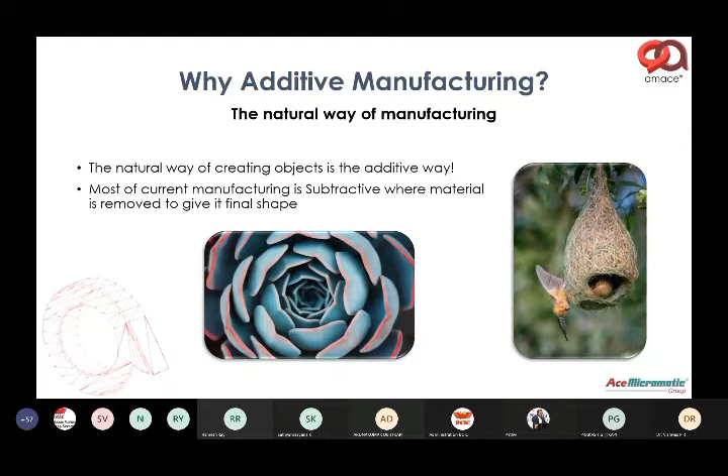In a similar way, what additive does is constructively add material to the exact shape or size that is required, and put the part or assembly together. So additive helps take us closer to nature, because the wastage we see in additive manufacturing is far lesser compared to conventional methods, which involve a lot of subtractive process. So this is one interesting aspect.

Today, one of the most popular methods is prototyping, which we've known for the past 30 plus years. People have been exploring additive manufacturing. In fact, this terminology until recently was very popularly called rapid prototyping, which for 20 plus years people called it, and even today some use it synonymously with additive manufacturing, because the technology was mostly popular for prototyping.

However, today things have changed. The technology has come a long way, not just limiting itself to making prototypes, but also being suitable for a production environment. But even in India today, the most popular domain for this subject is prototype development. So it not only allows you to develop components, but also assemblies much faster compared to conventional routes.

In many cases today, the whole manufacturing scenario is such that people want things very fast. What used to be a 5 or 6 year product development life cycle has probably shrunk to 1 or 2 years today. The expectation of newness is very short-lived. People get used to seeing something launched 1 or 2 years ago, and they want to see newer products.

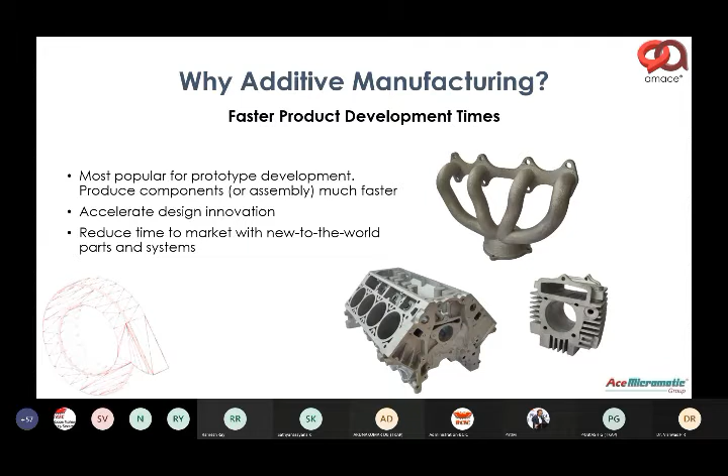Now, you brought this exact term, complexity for free. I'd like to illustrate this terminology in the form of a graph here. What you can see beautifully is a graph showing complexity versus cost. We all know that with increasing complexity of parts, the cost increases almost exponentially.

Something that is very complex, be it in shape, size, intricacy or criticality, would call for more axes of manufacturing, more stages of manufacturing, or more process. It becomes more process intensive, which is why the cost ends up becoming more and more. This is very common, we all understand this subject.

Now, when you bring in additive manufacturing, the interesting aspect is beyond a specific point, additive manufacturing ends up becoming almost free of cost in terms of complexity, meaning irrespective of the design, shape or size of the part, the only thing that matters is the volume, the printing time, and the material consumed. So if 200 grams or 300 grams of aluminum has to be printed, whether as a plain block or as a very intricate aerospace part, the cost of manufacturing would be almost similar. That gives a clear analogy of how additive really supports complex part manufacturing.

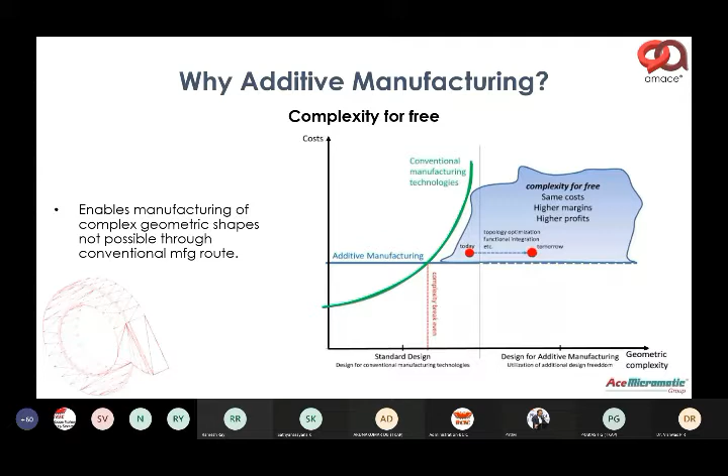Now, another interesting aspect is part consolidation. You can see a beautiful example here, courtesy General Motors, where for a seat belt assembly they've gone ahead and done part consolidation using design for additive manufacturing, wherein individual pieces, about 8 individual components, were all integrated into a single part.

Not only did this make it 40% lighter, but it also made it 20% stronger. You can see the monolith structure that is produced by 3D printing on the right-hand side.

Leaving the cost part aside, this is what they decided to do for a high-end automobile of theirs, which they felt would bring in not only reliability but also achieve a lot of the GD&T aspects. Today we all know an assembly is the sum total of all the parts that we put together.

Stack-up tolerances end up hitting you when you have individual parts which have to be made so critically. In this case, since it's a monolith structure, your overall accuracy can be achieved in a simpler way, as opposed to producing parts individually with geometry tolerance maintained and then putting them together as an assembly.

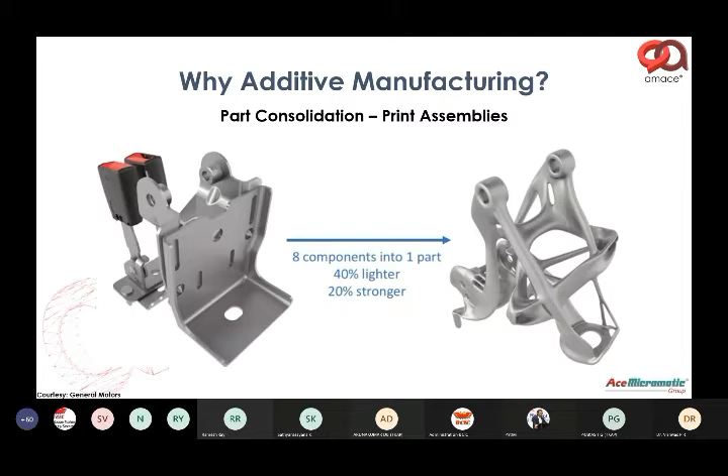Also, reliability increases because fewer joints mean better reliability. We all know that from our design school. This is an interesting aspect which is happening more and more, and it's being accepted very well. We'll see some more live cases going ahead.

Sir brought out another interesting example: mass customization. What does customization mean? We all know a tailor typically does customized clothes stitching for us, as opposed to what is available in a ready-made garment shop.

A very beautiful example, as Sir mentioned earlier, is customized hearing aids. Today, I'm sure we don't know the fact that any hearing aid our older people end up getting is made customized for the specific person's ear, ear size and shape.

So they're all 3D printed. You can see on the top left corner, the orange colored image is a hearing aid made specific to every person's ear lobe, or pinna, or the internal aspect, so that it fits in fine, as opposed to what used to be a generalized one-size-fits-all concept.

This allows the fit and function to be a much better match when it's a customized one as opposed to a generic one. Similarly, at the bottom, what you see is a dental crown.

Today, another interesting aspect we see is a dental crown. What used to happen was a mold taken in wax or another softer material, and then a crown is manufactured.

As opposed to that, today dentists are using intraoral scanners, and they create a 3D model in a very short time, and the lab technician prints multiple of these dentures.

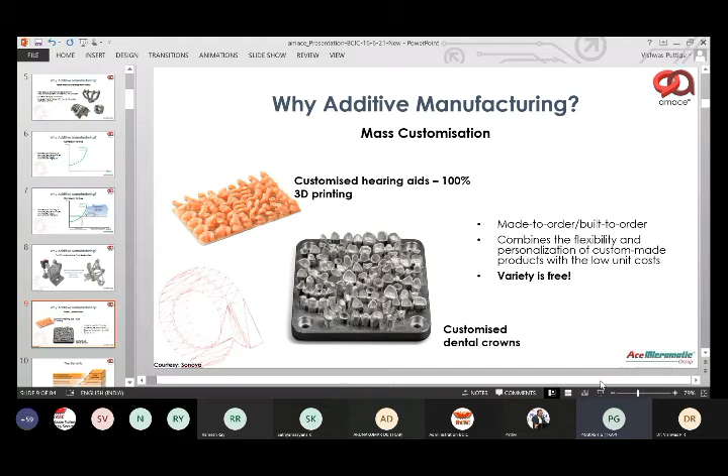So the batch size could be as small as one, and manufacturing can happen in large volume. That's the beauty here, and that's the interesting aspect of mass customization.

And then part replacement, which is reproduction of parts to avoid complex manufacturing processes, where you'd have heavy investments in tooling. All that can be avoided by printing parts where smaller volumes are required. And part consolidation, we discussed.

And of course, there's a topic called DFAM, which is Design For Additive Manufacturing, where you optimize the parts to suit 3D printing. We'll touch upon that going ahead.

So that was the why of additive manufacturing subject. Now let's look at the feasibility perspective. When we say feasibility, what are the parts that are feasible?

Though this sounds very interesting, and we go ahead and say almost any part that is required can be 3D printed, anything that can be designed can be manufactured, that may not be the case all the time. There are certain criteria, certain qualifying aspects which need to be considered before we decide if 3D printing is the most feasible route.

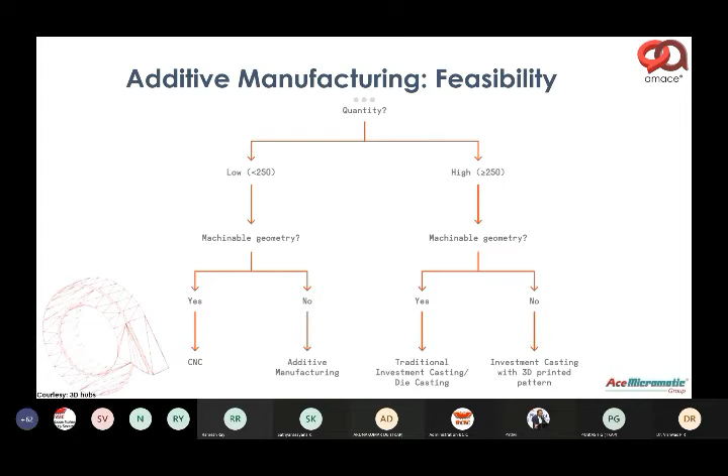What's interesting is that complex patterns you need to reproduce for castings or parts can also be 3D printed, which otherwise needs conventional manufacturing. 3D printing comes in handy here. So it's not for one specific aspect, but can be used for a wide set of activities from manufacturing. This is one aspect from a feasibility perspective.

On the same lines, here you can see a comparison between subtractive and additive manufacturing. On top is additive manufacturing, and the bottom image on the left is subtractive manufacturing. As I explained earlier, conventionally, to make a part like a sphere here, a lot of subtractive or waste material gets generated.

You mill it out and then scoop it out to get the actual part. Whereas with 3D printing, with very minimum wastage, you're able to get your final part out because you're adding just enough material to get the part to its final shape.

Now on the right side, what you see is a comparison. We saw cost versus complexity earlier, but at the bottom I'd like to refer to cost versus number of components. You can see when the volumes increase, 3D printing may not be very feasible, especially because your costs generally tend to be on the higher side.

Whereas with conventional manufacturing, when your volumes are low, your investment towards development cost, or towards making dies, fixtures and patterns, is going to be expensive. So there's a tipping point beyond which, in terms of number of components, 3D printing may not be very suitable, unless varieties or complexity in the specific parts increase. This is another interesting feasibility perspective used to decide when 3D printing will be very useful for manufacturing.

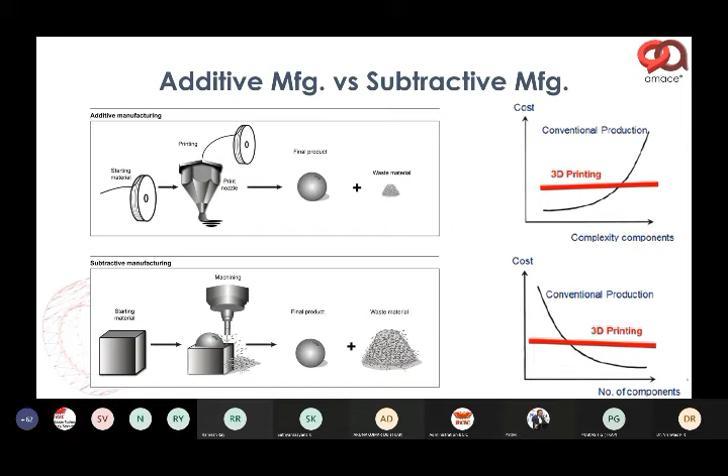This is basically the process flow to give you an idea of how 3D printing happens. From the design stage, stage 1, shown here as a 3D CAD or 3D model development, we convert it into STL. STL is a format of your 3D model which converts any volumetric part into triangulated surfaces, as you can see there, and those triangulated surfaces are further sliced into multiple layers, as shown in stage 3.

This is an exaggerated version showing thick slices, but in reality the slice layer thickness could be anywhere from 30 microns up to about 100 microns, and each sliced layer's data is fed to the printing machine, which fuses layer to layer creating a strong bond, forming the solid part. There could also be a small finishing activity, shown as surface finishing with a hand tool, giving the final shape. This is a generic process flow for 3D printing.

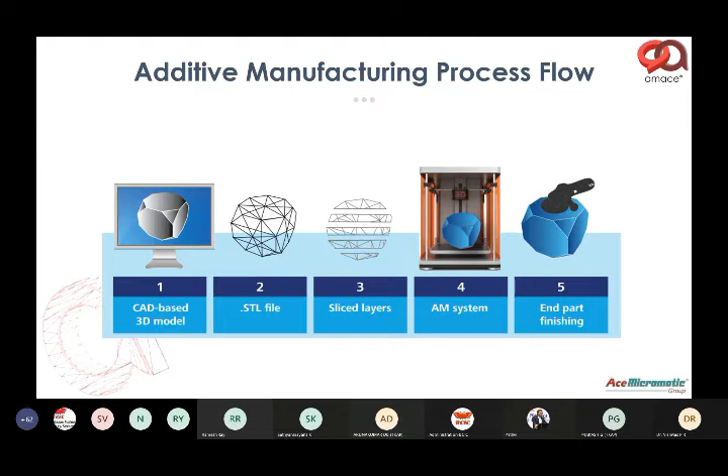So this gives you an idea of the feasibility perspective. Now let's look at different technologies that are there in additive manufacturing.

Though this looks like a big image here, on the left side I'd like you to look at the different materials currently popular for 3D printing - things like wax, plastic, sand, metal, ceramic. These are some of the more popular ones being used. Other than these, there are many more happening in terms of biomedical or tissue and organ printing, and food printing. There's a lot of interesting research going on in each of these areas.

But specific to industry, we have an interesting aspect here. At the bottom, what is shown is from a durability perspective, surface finish perspective, detailing perspective, or application perspective - lower and higher. There's a distribution which shows what technology has found more application or more suitability.

So these are some of the prominent technologies today: stereolithography, polymer jetting, binder jetting, fused deposition modeling. The FDM technology is the most popular for plastics or polymers. These are more popular for hobby or small desktop printing, which you'd find in a lot of manufacturing areas or small education institutions.

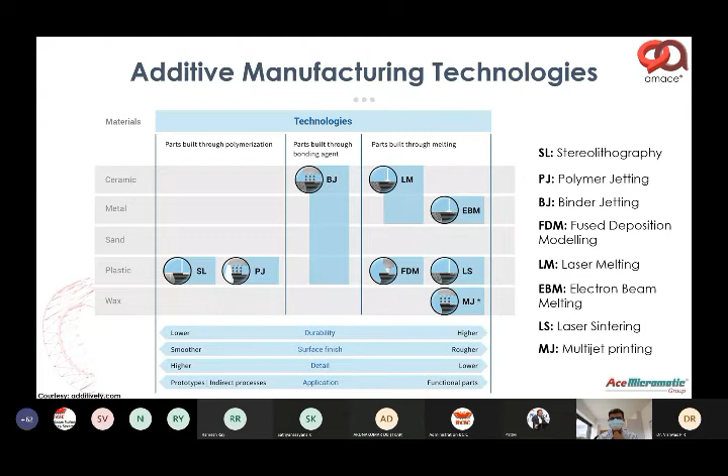So these are some examples. I don't know if I mentioned sand printing today - there are machines which can print sand to give you better molds to make your core box or your parts, making it much more feasible, which otherwise is very difficult to manufacture using conventional processes.

You have multicolored polymer printers, which means you can print almost near-life parts. In fact, a very straightforward transition has been made by all our 2D printers - printers like HP, Canon, Ricoh and other 2D paper printer manufacturers have upgraded themselves into 3D, because it's a very logical diversification for them, taking what they did with colored material on paper and adding the third dimension to the manufacturing space.

So polymer is again very popular, but mostly for applications which are not very industry specific. Then ceramics - not only for interesting, aesthetically good looking parts, but for a lot of high temperature applications - ceramics is drawing a lot of attention. We have graphite being printed, and of course metal is well known.

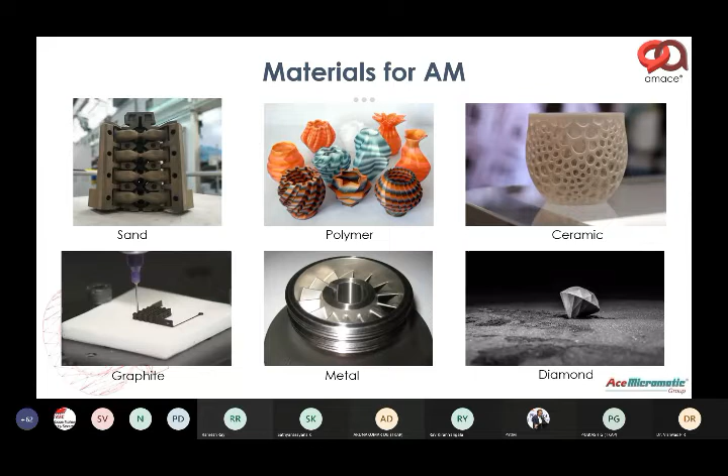One of the latest is diamonds being printed - not necessarily for ornamental purposes, but for cutting applications. We're all familiar with Sandvik, who's been doing diamond cutting tools. Now they've gone ahead and printed diamond for some high-end cutting applications where very high levels of hardness and toughness are required. So people have been doing different materials - these are some of the more popular ones shown here for illustration purposes.

Now this is an animation which shows you how the printing technology works. You can see powder being spread by the spreading unit, and after spreading there's a laser which melts it. This is more popular for polymers or metal printing, where metal powder is spread on an existing plate, and the laser melts that powder in a selective area as commanded by the program or controller, forming that irrevocable bond or fused part.

You can see on the left side a part printed almost 70-80%, sitting in the middle of a cake of powder. The melted part is the solid part, but around it we have complete powder surrounding it, because it's formed in a layer by layer way. You can see the layer thicknesses - accuracy is something that would be of interest to you today.

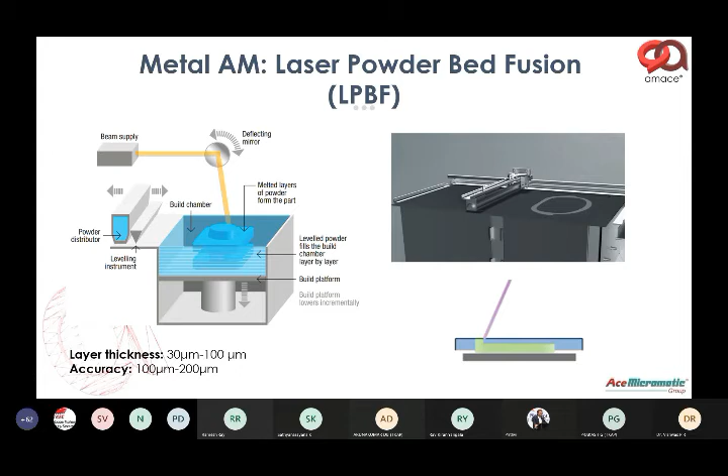The parts printed in this way are not necessarily fully finished in terms of functional use, but it's much better than near net shape. It can give you close to 100 microns tolerance levels. So for parts which have open tolerance or minimum tolerance requirement, these would be very suitable. But for something much more critical, you would still need that final finish skin cut to give it that final accuracy or get that final dimension right.

So that's the one small missing aspect that needs to be worked on further. People are working on that. So what you can see here is another similar video which will show you the metal printing that's going on.

The interesting aspect is it doesn't need any further post-processing. It can get separated either with a hand tool, a bandsaw, or a wire cutting machine, and then used for its final application. So this is basically how the concept and technology works, and how the parts are produced using 3D printing.

All it needs is a 3D model. So you can take it from a design stage or design desk all the way to a finished part in a matter of few hours. We have some very interesting cases which we'll share, showing how we've been able to meet some of the urgent demands in the industry in a very short time using 3D printing.

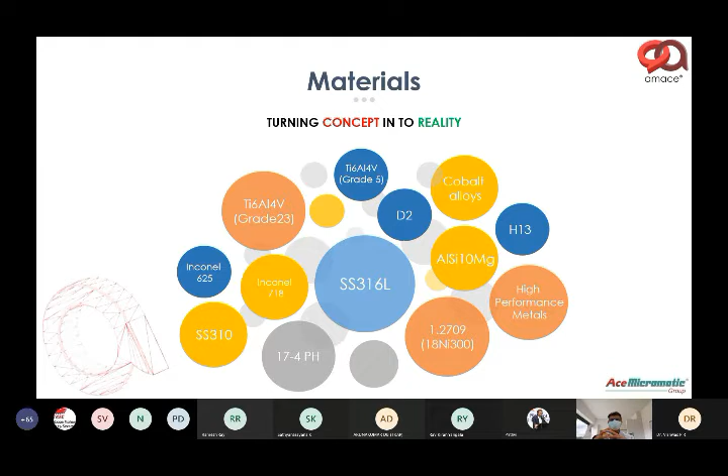Though the basket of materials is limited compared to what's available conventionally, people try to map each of these materials to see what would be closest for their specific application, and then use that either by altering process parameters in printing, or as a post-printing activity like heat treatment or surface treatment, to bring it close to the metallurgical aspects or mechanical properties needed. So this is what we've summarized from a metal perspective.

Moving on to DFAM, or design for additive manufacturing. What additive actually does is, it will never be able to replace conventional manufacturing in the form where if you're producing a part for 500 rupees, we can never answer the question, can you do the same thing for 499 or 480 rupees? So it's not a direct apple-to-apple replacement compared to conventional manufacturing, which gives the reliability or feeling that it's still a very long way before 3D printing can directly replace any conventional manufacturing process.

However, where you can bring out or leverage the strengths and advantages of 3D printing, people have been able to benefit immensely using it. For that, what's necessary is this subject called design for additive manufacturing, where one needs to unlearn some known technologies of design and relearn methods of 3D printing or additive manufacturing.

One aspect you need to understand is how to go about the 3D printing process. DFAM, or design for additive manufacturing, is a method for understanding how intricate shapes can be made, how to achieve weight reduction or part consolidation, or any specific optimization of design needed to meet your end goal requirement. There are multiple aspects to design for additive manufacturing, but two of the more important ones are what we'd like to explain here.

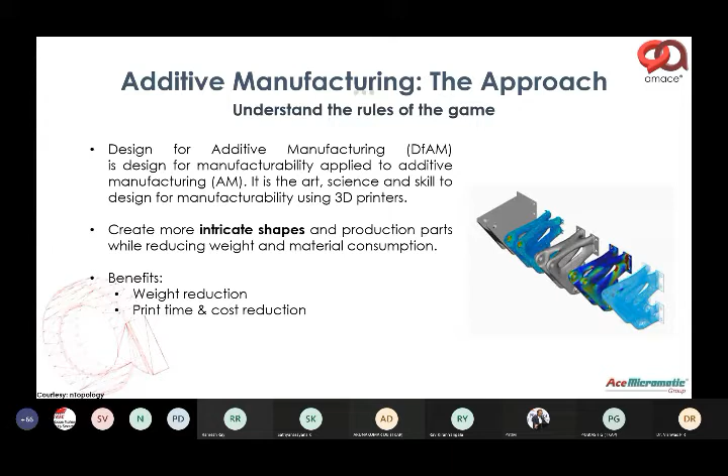One of them is called topology optimization. You can see multiple images and examples here, and what's illustrated is modification. Topology optimization is basically where you change or modify the topology or geometry of the part to suit 3D printing, thereby also meeting your end goal.

In certain cases, if you do an analysis for structural optimization, thermal optimization, or weight optimization and run it through software such as ANSYS, invariably the design that comes out is much lighter, but also very complex to manufacture or even comprehend manufacturing. For sake of manufacturability and ease of manufacturing, we end up adding a lot of additional redundant material to the design so it meets feasibility requirements for casting, forging, or other manufacturing processes.

Whereas with 3D printing, that doesn't exist. You can see some of these parts optimized for weight reduction. Here's a classical case of a manifold block where a weight of 30 kilos was reduced to almost 5.5 kilos by 3D printing.

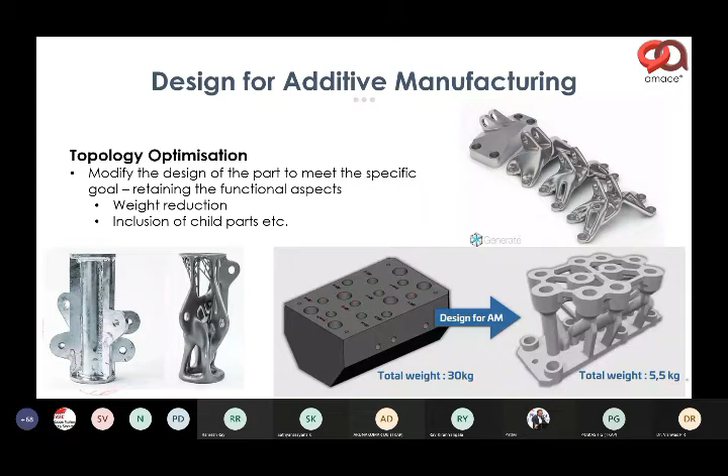Part consolidation was another interesting aspect. You can see each of the rivets or child parts that were assembled were eliminated because of 3D printing, since those features could be directly created in the printing process itself. That's the interesting aspect and strength of additive manufacturing, and what design for additive manufacturing is doing.

If someone asks, okay, now let's start working on 3D printing, what's the one aspect you'd want us to focus on? I'd say start learning aspects of design for additive manufacturing, start exploring this because it doesn't cost much. There is simple software for each application, be it medical, aerospace, or automotive, and people working on it where you can explore design for additive manufacturing.

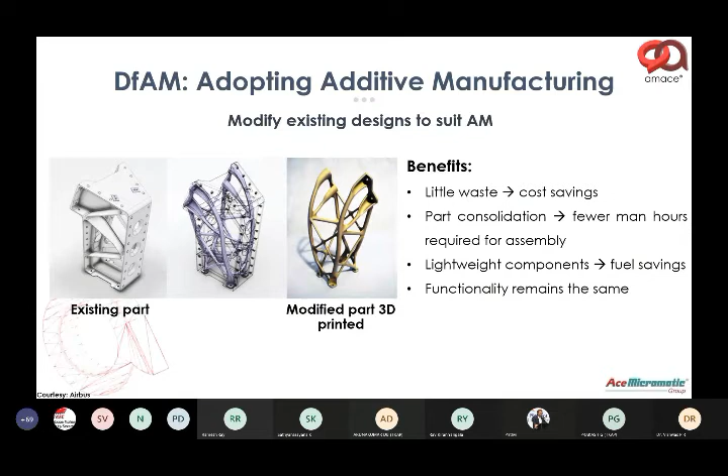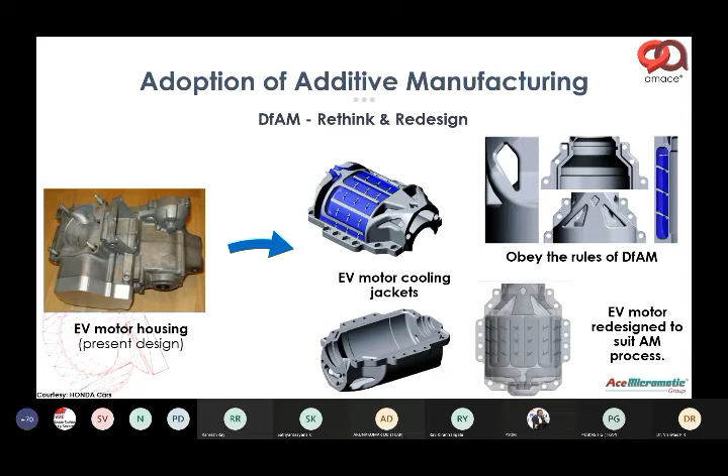Here are some more cases, again for electric vehicles, where people have explored making cooling jackets using 3D printing by creating artificial cooling channels. I believe this was done by Honda Cars in Japan for their electric vehicle, where it follows the rules of 3D printing, or DFAM, in their manufacturing.

Another interesting aspect of this design for additive manufacturing is lattice structure. One is, of course, optimizing the structure itself, but second is to make it lightweight. So which is nothing but adding these perforations, called lattice, instead of an infill of solid material. We add a lot of lattice structures here.

This not only makes the part lighter, but also retains, if not makes it stronger, the functional aspect of it. In many cases, by 3D printing lattice structures, you're also reducing the cost, because one of the key considerations for cost is the amount of time you're engaging the machine or the material you're consuming. When you're producing parts with lattice structures, you're spending less material and time on the machine, thereby reducing the cost also.

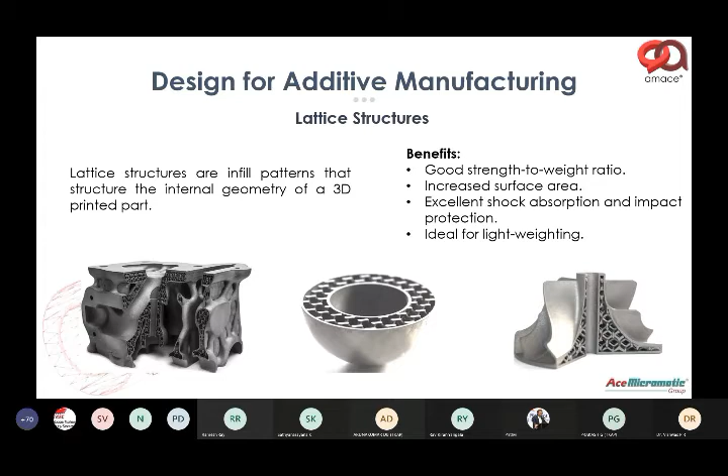This is another interesting aspect being explored by people doing 3D printing or considering it as a method for part development, where they infill their parts with lattice structures like this, as you can see. So this is just a summary of additive manufacturing, or design for additive manufacturing.

Now the interesting aspect we'd like to explain is market segments and case studies. Multiple markets, multiple segments are exploring 3D printing. We'd like to show you some of the more prominent ones today. Some of them, as explained here, are medical, aerospace, automotive, tooling or die mold, and finally general engineering.

If you look at it from a distribution perspective, you can see today this is how it's spaced out. We have medical being the largest, because of some very interesting aspects which we'll see next. Others are civil, aviation, and defense, which take in more than 23% of total market share.

Sorry, I lost my screen. Is my screen visible? Yeah, your screen is visible.

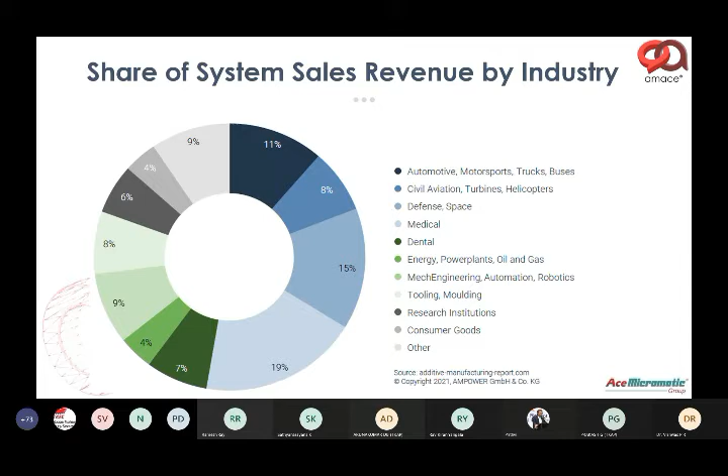You're right now at the share of system sales revenue by industry. Sure, okay. Other fields, like I said, automotive is about 11%, especially for high-end applications of motorsports, where it's taking a lot of interest, and many other segments. So the more popular segments, which take away more than 50-55%, are medical, aviation, automotive, and defense. So that's the segment-wise distribution.

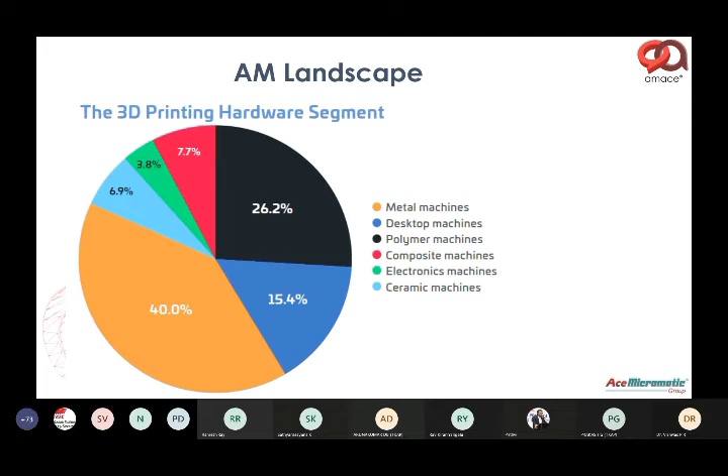Again, there are different technologies within each of these. We will skip this aspect, just to give you an idea: metal printing, especially the powder bed fusion one we saw a while ago, is the most popular technology and most used in industrial application by each of the sectors we saw earlier. That takes away at least about 39-40% of the overall market segment.

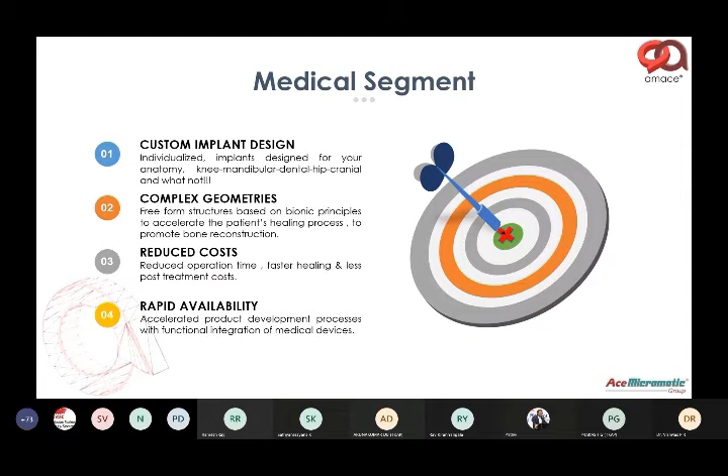From a medical perspective, what is interesting is custom implant design. Today, one of the most preferred areas is medical printing of implants. When I say implants, I refer to things like what is shown here. You can see a cranial implant, which is basically a skull part.

Today, when a person has an accident and there's a skull injury, and the doctor declares there's bone loss and he needs an implant, the patient's family invariably has two options. One is to go for a standard implant, a titanium plate made out of a conventional process, and to suit that existing plate, a good portion of the patient's bone will have to be chopped off so it can fit in. This is very similar to telling someone 40, 42, 44 sizes of shirts as opposed to a precise custom size.

Whereas with 3D printing, all we need is a DICOM file which comes out of CT scanning or MRI scanning tools, which a doctor gets done for the patient anyway, and that itself is enough. In about 2 or 3, even 4 or 5 hours, you can have an implant ready for the patient, specific to that person's shape and size.

On a similar line, you can see kneecaps being printed. This acetabular cup, or hip socket, with a lot of lattice structures, is being 3D printed today, mainly because the uniqueness here is that it allows bone tissues to grow through them.

It's a process called osseointegration, which means the bone tissues or muscle tissues grow through these lattice structures, giving it a much better bond and less pain to the patient, and it lasts much longer as opposed to the conventional methods. So mandibular is the jaw joint of a human.

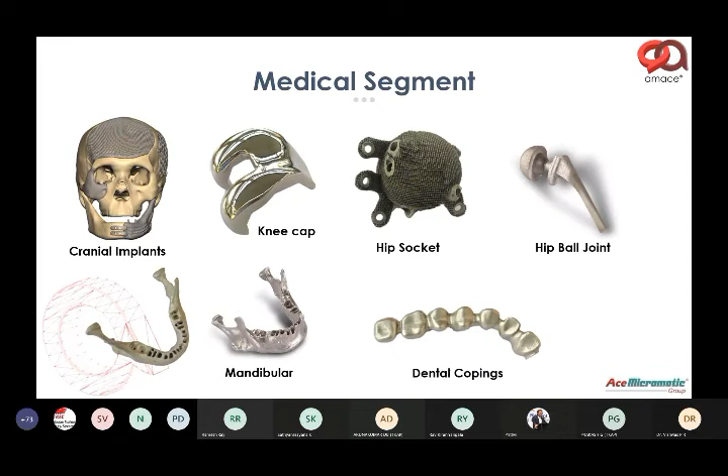So this is an interesting case for parts for medical equipment. This is something that was done during the lockdown by us. One of the ventilator developers wanted some parts developed or made in a very short time.

We received an inquiry at 10 in the morning on a specific day during lockdown. Fortunately, we were working, and in about 45 minutes, a proposal was sent. The customer confirmed in about 3 or 4 hours, saying they'd like to go ahead with it. We printed the part, and the next morning at 9:30, the parts were shipped. So in less than 24 hours from receiving an inquiry, the parts were shipped to the customer.

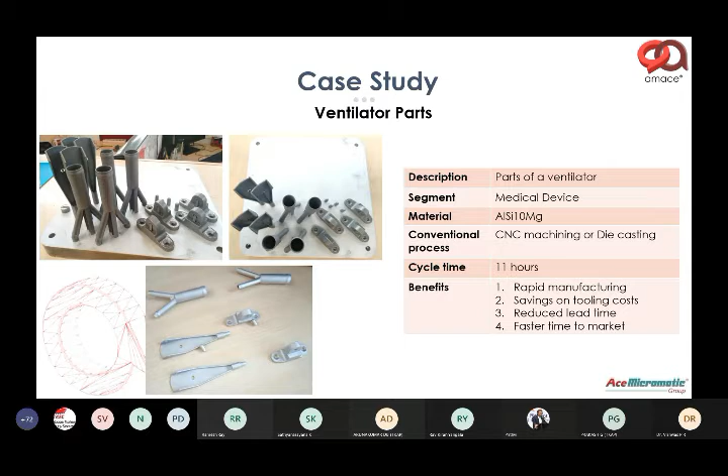So it just gives you an idea of what 3D printing gives you in terms of capability and the potential this has for any industry. This was a specific case where there was an emergency and it needed that kind of attention, but it's possible for all other sectors also.

Now, very interesting is this here, which is bioprinting. This is a game changer in human life, where people have been successful in printing human tissues and human organs - especially tissues where you can see ears, nose, and different skin parts, facial elements being 3D printed today, especially in an aspect called facial reconstruction of human faces, which is happening very well, where people who either as a part of their cancer or a war victim have lost a major part of their faces are being reconstructed, mostly from a cosmetic perspective.

Another interesting aspect is artificial organs. Today, I'm sure you all know there's a long waiting of at least about 25-30 years and over many lakhs of rupees for any of these organs, if any one of us wants an organ to be transplanted. Whereas if something can be 3D printed, they can be made in large volumes, and these requirements can be met much better. This is already happening today. Even in Bangalore, there are people working on bioprinting, where some of these tissues are being reconstructed and 3D printed. So this is going to be a game changer going ahead.

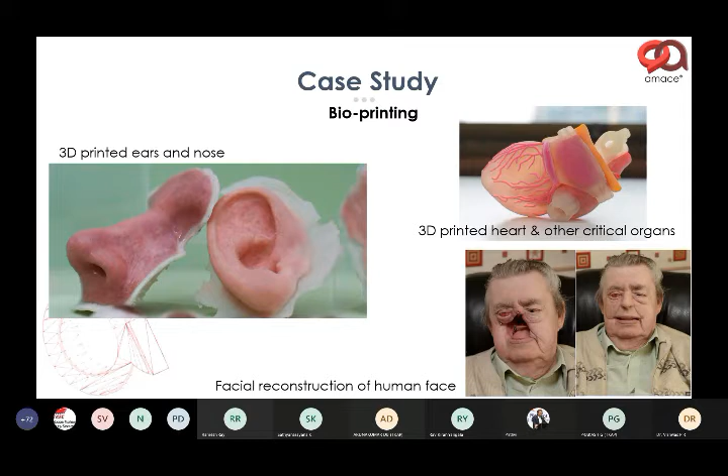It has already been proven, airworthiness done, tested, and today available for commercial applications. So this is what is happening.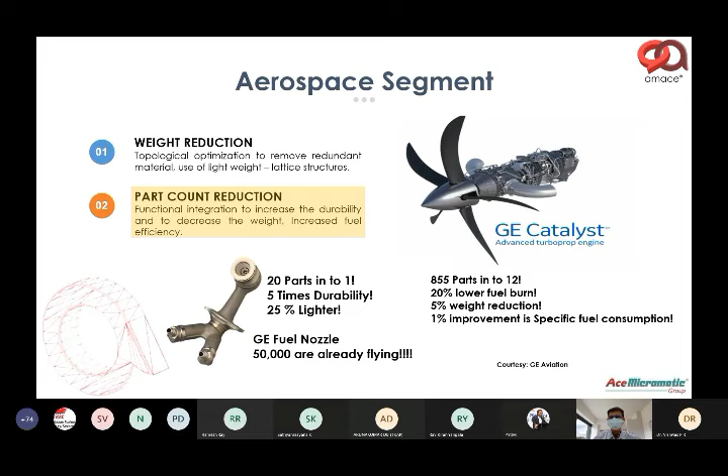From a cost effectiveness perspective, in aerospace the buy-to-fly weight can be as low as 2 to 3%. By buy-to-fly, I mean the input material weight for an aerospace part could be as high as a 10 kilo titanium block, but the final part could be as low as 200 or 300 grams. So the entire remaining weight goes away as scrap, which sells at maybe one-tenth the price of the actual raw material. Whereas with 3D printing, you are able to manufacture the part with just enough material and then give it the final finish cut or finish machining to get the final output. That makes it much more cost effective for aerospace applications.

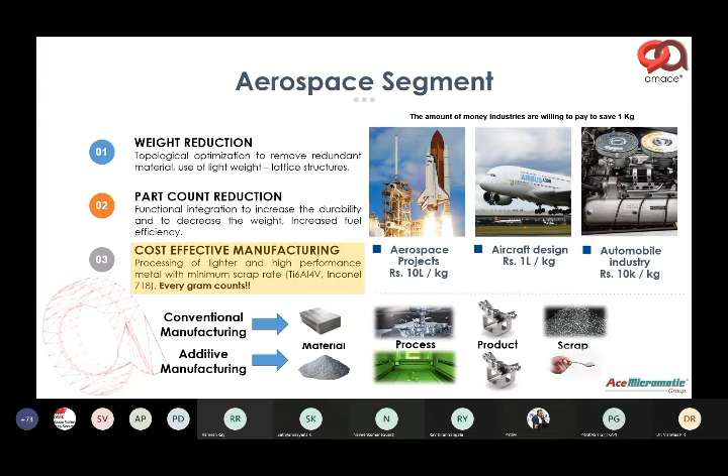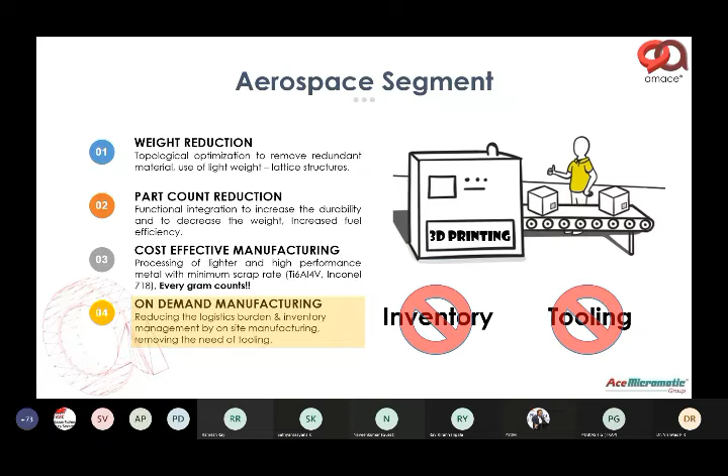And finally, on-demand manufacturing. This is another interesting case, not just for aerospace but even for automotive. On-demand means producing a part right in time, only when it is required, at the place where it is required. In an automotive context, the interesting aspect is spare parts, which we'll touch upon shortly. But with aerospace, what it means is no inventory, no tooling. You are directly making the part right when it is required. That's the interesting aspect on-demand manufacturing has.

So these are some examples of different parts and equipment being made. We saw the fuel nozzle. In fact, on January 25th, 2020, the engine made for the Boeing 777X took off, and it's been flying today already with over 300 printed parts in that engine. This shows that these are not just for prototypes, but have already come of age for full production.

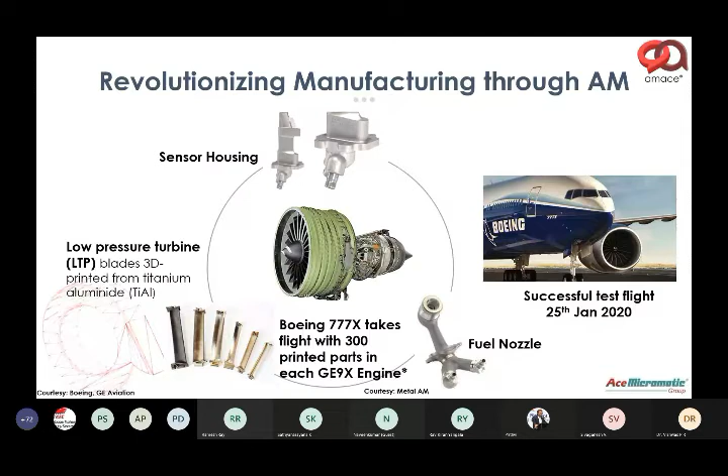Just an example, and I'm sure you all understand the criticality of the aerospace industry. There's a beautiful timeline published by one of the industries which says that going ahead by 2030, aircraft will be designed keeping 3D printing in mind, where every part or multiple parts will have aspects, either internally or externally, that are 3D printed, mainly because of lightweighted structures and airframes more specifically suited to 3D printing.

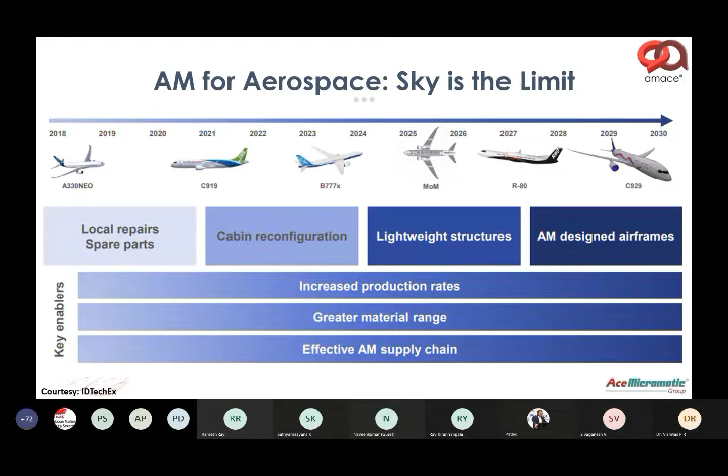So that's the aerospace sector. Now from an automotive perspective, there are plenty of applications and advantages. Some of them are things like generative design, cost effectiveness, prototyping, spare parts production, and mass customization or individualization. We'll look at just a few of them here.

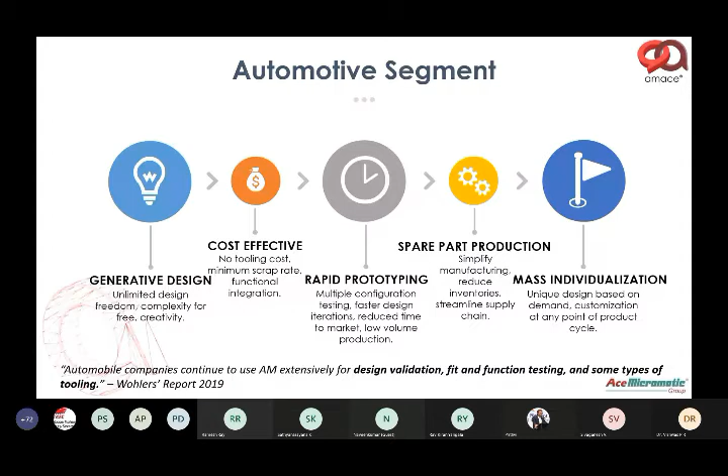We saw this example earlier by General Motors. Invariably, when we get into product or part development, we do a lot of design, then subject it to some simulation or analysis to find the most suitable design. We end up manufacturing only one or two of these parts because of the investment and time it takes. Whereas with 3D printing, the advantage is it allows you to produce many of these parts, put them to use, and then decide which is the most suitable one meeting many of your constraints. That's the beauty here.

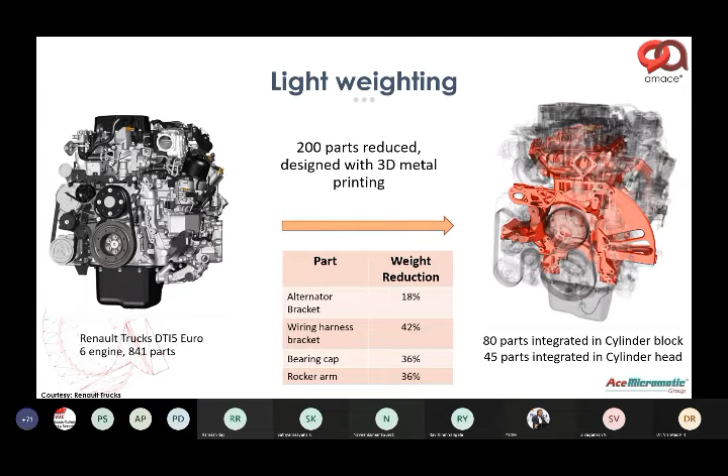This is an interesting case of Renault, where for a truck engine on one of their newer trucks, they ended up using 3D printing, and nearly 200 parts were reduced from their conventional design. It's a nice video showing a lot of weight reduction and part count reduction.

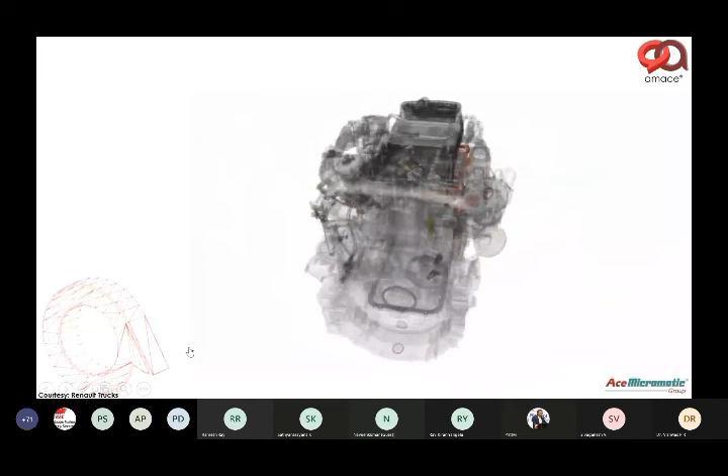We'll quickly look at this video here, which shows the illustration. You can see the before and after images of each of these parts, how weight reduction happened and by how much.

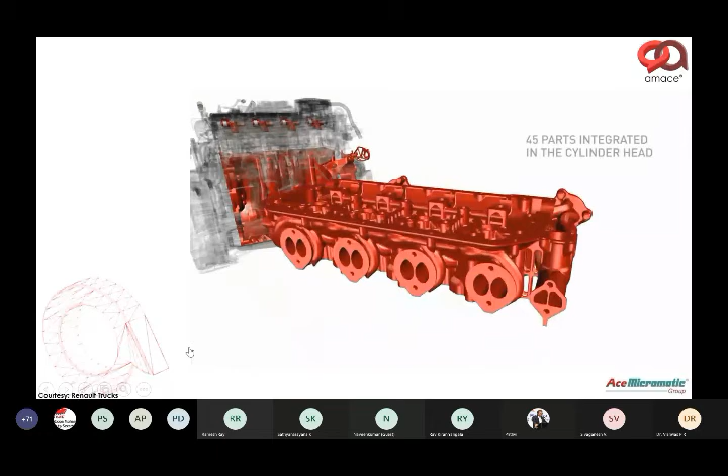So like this, they were successful in bringing out a lot of improvement in the whole manufacturing process and in the results.

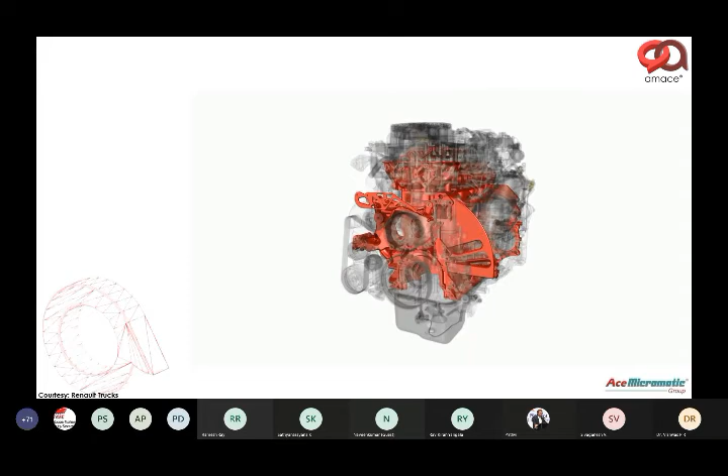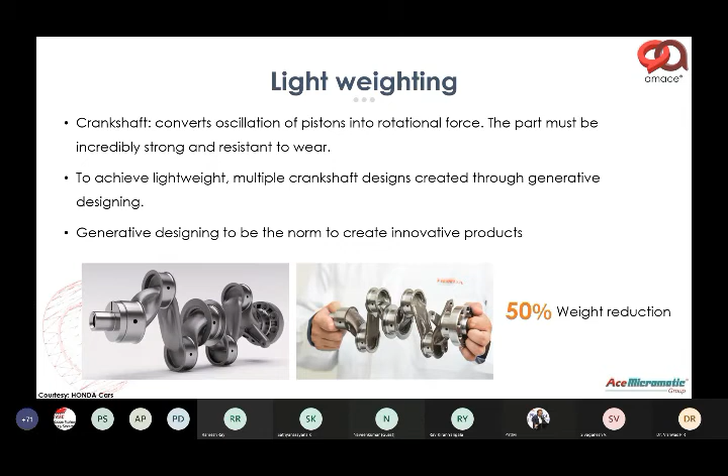There are many other automobile manufacturers who have tried either lightweighting or part consolidation for some of their high-end automobiles. More examples of cases where parts followed topology optimization, doing lattice structures, lightweighting, or consolidation of parts, especially from a development perspective, or for very niche, small volume, low volume segments of automobiles.

Now, the future of additive manufacturing is mass customization. Today volumes are high, but varieties are very high too. So a day may come when the batch size can reduce all the way down to one, where one would have to produce a part or an equipment very specific to that particular customer.

Some automobile manufacturers have already taken the plunge into this, where BMW's Mini is offering to print some of your softer cosmetic aspects very specific to your taste, where one can choose what would be more suitable, design them, get them printed and customized for their automobile. Though this might add a cost today, going ahead the costs will come down so much that it will become a very common thing. Today shoe manufacturers like Nike and Adidas have already started making shoes very specific to your foot size and shape.

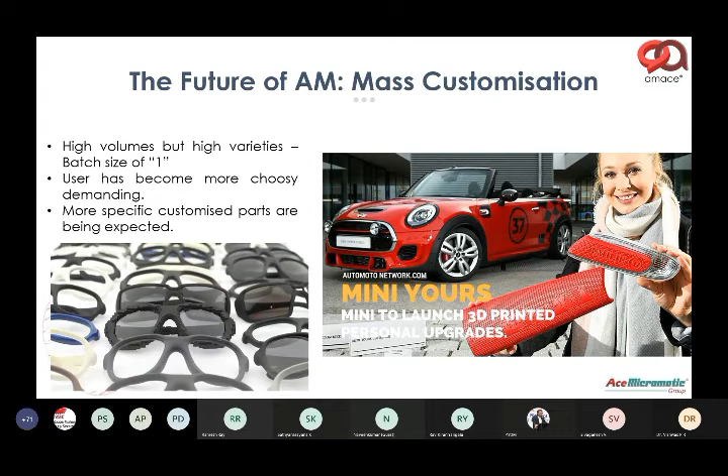They'll make you walk on a specific equipment which will capture all your data, and then they will print the bottom sole and you can choose what you want as an upper sole skin, then manufacture that and ship it to your home. Such things are already happening in some of the commercial, more popular kind of equipment. I'm sure for some of the common ones also the day is not far where we will have to mass produce parts, but they're all going to be customized for specific requirements.

Another interesting aspect is on-demand component manufacturing. As I explained earlier, today there are some automobile manufacturers in the West who have a commitment to their customers selling spares as long as the equipment would be in use. For example, a Daimler truck or a Mercedes-Benz car, if it's 30 years old, there's a commitment by the OEM to keep spares as long as you continue to use the automobile.

When they have this commitment, they also end up having heavy inventory of spare parts, few billions of euros worth, because they can't keep the customer waiting. So they end up stocking them in different warehouses, which is too expensive. One stand some manufacturers have taken is to keep this data in digital format and produce parts as and when a requirement comes up locally, just by giving the drawing or 3D model of that part and finishing it. Even if it's 10 or 100 times the cost compared to inventory keeping cost, this would be much better for the manufacturer.

This is in fact already a business. We have manufacturers from France and Singapore with whom we are working who have this as their actual business, where they take in legacy and obsolete parts from OEMs, convert them into 3D models, store the data in cloud, and give the entire repository at any point in time. If a specific model comes up for requirement, they manage the documents and even manufacture or print these parts, finishing it and offering a complete solution to the customer.

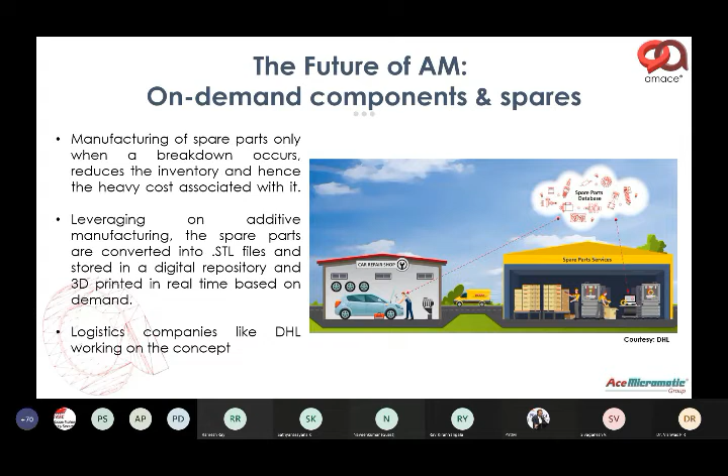In fact, some logistics companies like DHL have taken this up very seriously, wanting to offer this connectivity where they can produce a part, print it and offer it in a very short time. So this is another interesting trend for the future which will come up much stronger going ahead.

So we'll look at some case studies now of different parts, different examples. This is a rear wheel hub that was done for an electric vehicle. Here we also did some topology optimization where weight reduction happened. This was for a sports car manufacturer, an electric vehicle project.

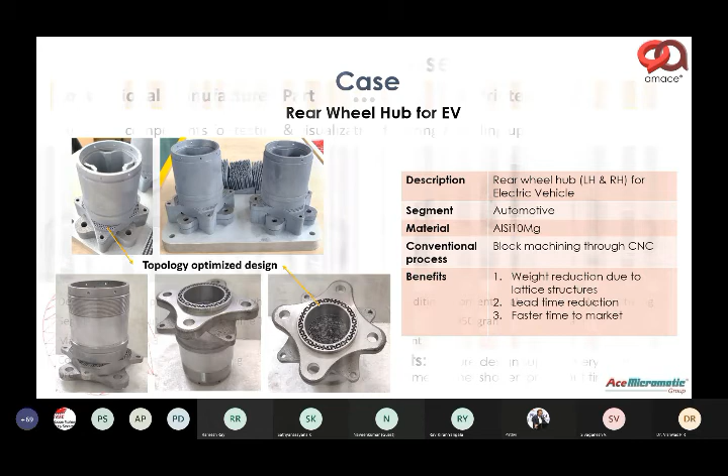Some samples that have to be made for faster fixturing tooling. This was something considered for an automobile component manufacturer, where instead of doing it out of imagination, they ended up deciding to print it very quickly and then put it to use. So fixture development and inspection plan development all happen much faster and better, instead of doing it out of design or just simulation.

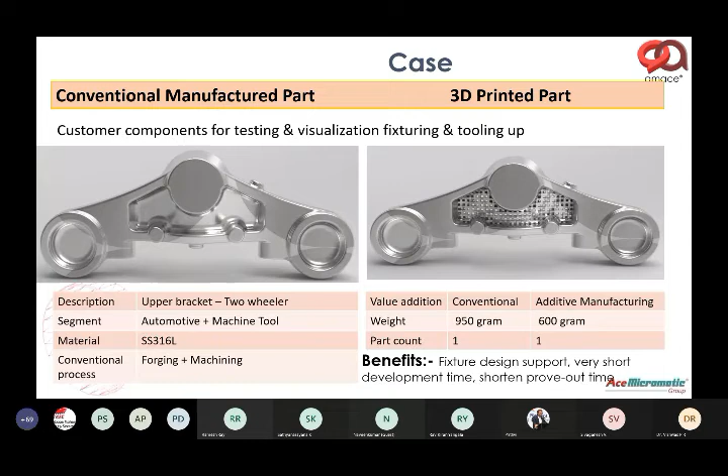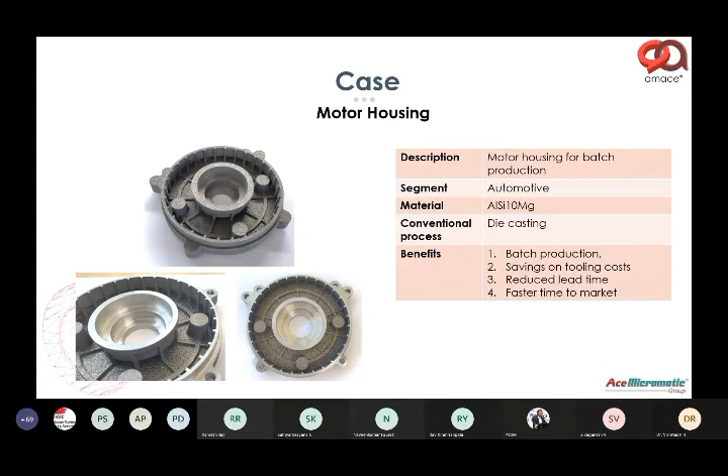So one has to identify what aspect of 3D printing we're leveraging to get benefit from. It cannot be a direct apple-to-apple replacement, but time, effort, rejections, or some other concern can be addressed where 3D printing becomes a solution. This is one such case.

This was an interesting case where an automobile manufacturer getting into electric vehicle manufacturing was exploring a three-wheeler electric vehicle. They were sourcing parts from a place they could not reach during the lockdown, which stopped their entire supply chain for their proto development phase, and they only had one set of samples that they were able to give us for reproducing them.

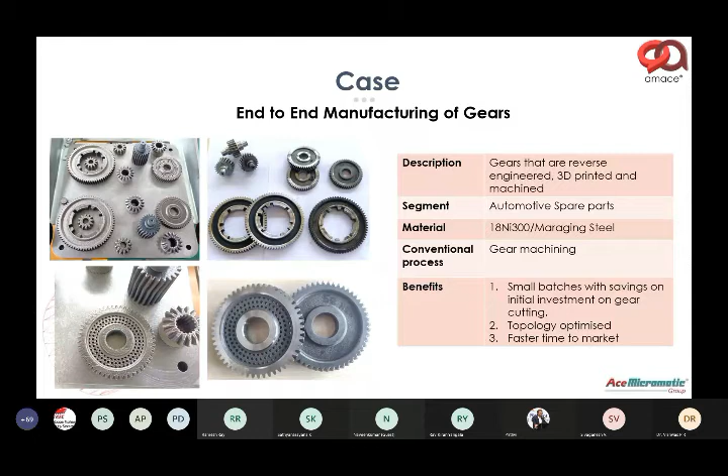They did not have much engineering documentation either. So we were able to reverse engineer it and recreate the entire documentation — 3D models were generated. We worked closely with a gear manufacturer to create the 2D drawings and acceptance criteria for these parts. The parts were printed, and we even did some lightweighting. They were heat treated, finished, and offered to the customer as a fully finished solution along with the engineering documentation, which helped them mass produce them locally during this time of crisis. So the solution is much wider than what we can imagine in general.

When I say tooling, I refer to die and mold manufacturing, specifically plastic injection molds. In plastic injection mold manufacturing, nearly 65% of the total cycle time is cooling time. This is mainly because anything ejected faster than required ends up warping, which is a deformation we wouldn't want. So the cooling of these dies is a major concern. Using a conventional route, these dies are cooled using gun drilling or deep hole drilling to create cooling channels, whereas with a process called conformal cooling, things work differently.

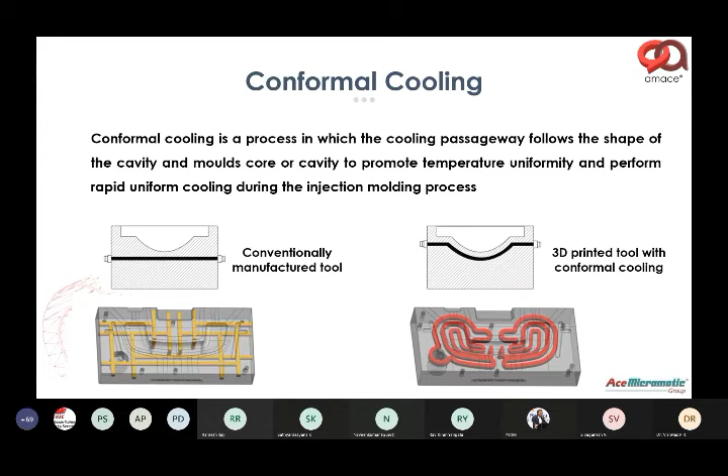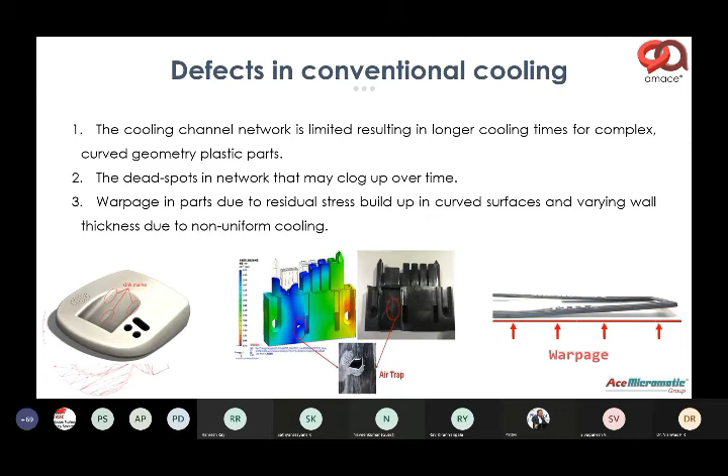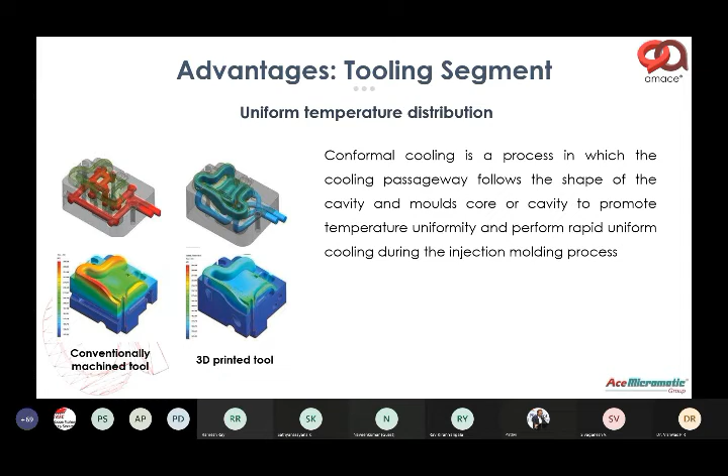3D printing is playing a major role in die manufacturing also. In some cases, what used to be a cycle time of 55 seconds was brought down to about 33 seconds, because what was conventionally made using just 4 straight holes was converted into a conformally cooled design, which brought down the cycle time by 40%.

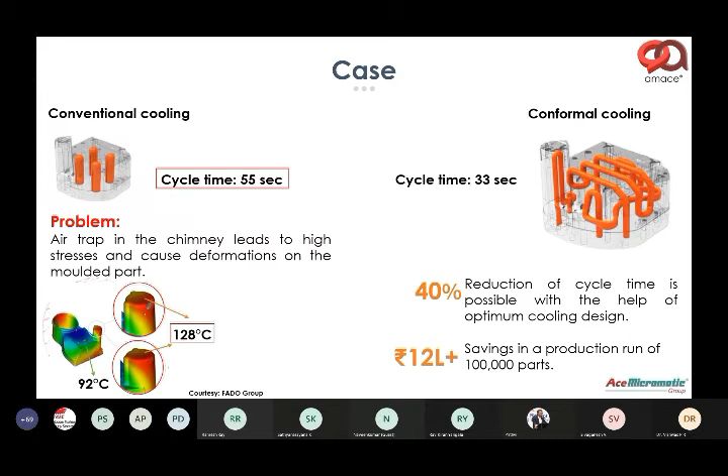In this case, the specific customer had a savings of over 12 lakhs. There are more examples like this, where cycle time was reduced significantly from a cooling perspective, and the customer found it very useful, either in terms of time reduction or a specific feature that was coming out as a rejection.

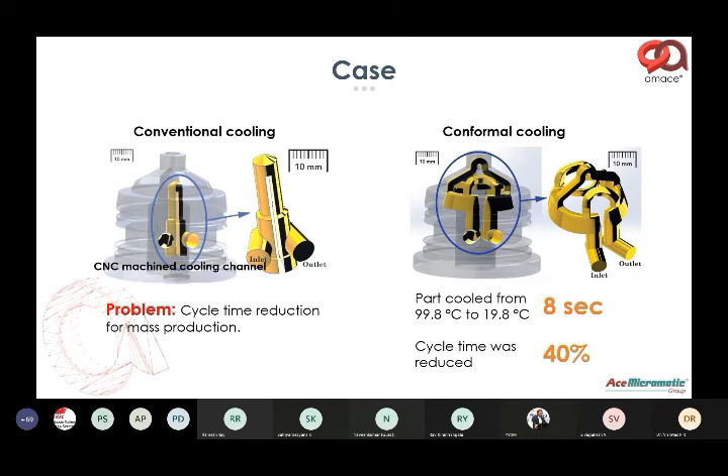In die casting also, the rejection rates could be as high as 20-25%. Whereas with 3D printing, in some cases we've seen, people have had much better success rates of getting aluminum die casting parts done, because features like blowholes or specific aspects can be cooled better, and your part output is much better. So that's interesting - more cases about the dies that are done.

We'll skip this for want of time.

Other aspects are things like fixtures. We all use machine tools today. This is a specific case - we worked with an automotive component manufacturer in Chennai, where they were using VTLs, and we're all familiar with the concept of seat check.

So anything that either has automation or critical component machining, we want to doubly ensure that the components are sitting correctly before we do a critical operation, either milling, boring, or a very critical drilling operation. If there are any burrs or chips blocking the component's resting area, then we end up having deformations, defects and rejections. So the seat check is critical.

This was a specific case where a fixture part which was being imported from Germany was converted to 3D printing by this customer. You can see a hole at the bottom here, which was not in a straight line and was very difficult to make conventionally, but was made using 3D printing. This was specific because the design itself could not be made in a conventional way, and it had to be designed this way for its specific application.

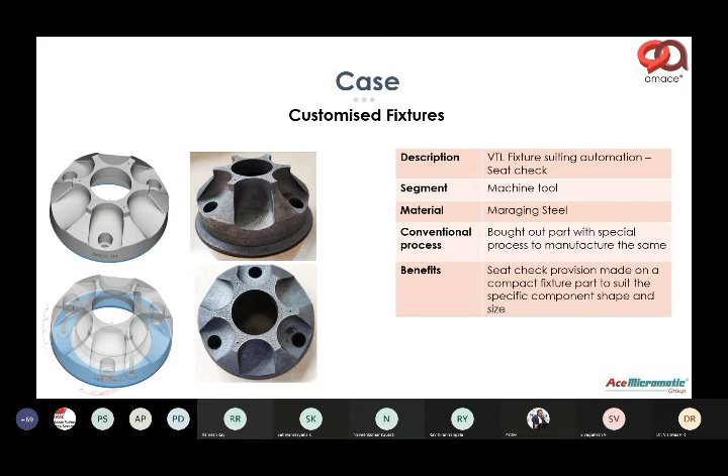So like this, 3D printing is not only helping in part production, but also aiding support and equipment like fixtures and patterns.

This is another interesting case we analyzed, where robotic gripper arms were considered for 3D printing. It allowed downsizing of a robot - instead of the arm being heavy and bulky because of its shape and size, with 3D printing a concept was brought where it could be made much lighter, with just enough material added so you could choose a smaller robot size.

Even the fingers are being considered for 3D printing, where they have a very special shape and size, and are low volume. So instead of making them conventionally, they could be made lighter and more specific to the part shape to meet that specific requirement. So like this, printing can be used as support for production also, not just for production itself.

So that's what we had in terms of the case studies.

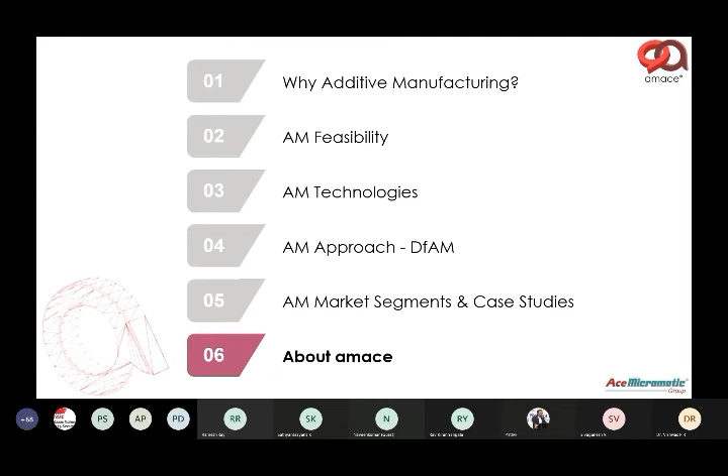We'll just talk about one slide to give you an idea of who we are. As Sir rightly said, we are amace Solutions, a joint venture between Ace Designers, the turning company, and the machining company. We are the additive manufacturing wing of Ace Micromatic Group, and we provide printing services.

We've been doing that for over 3+ years, and researching additive manufacturing for over 5 years. This came to us because metal cutting has been our bread and butter, and a potential disruption is what we felt about 5-6 years ago. We wanted to explore if there was any opportunity for us in the newer technology, and that led to an R&D project, which finally ended up becoming a separate company in itself.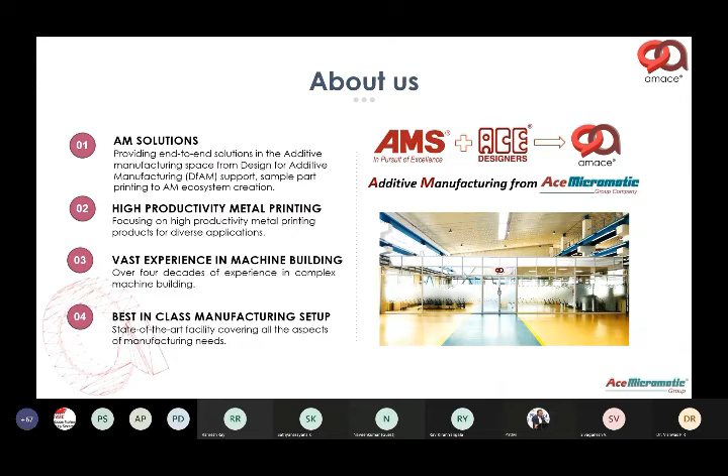The long-term plan for us has always been to be able to make machines. So what led to 3D printing services has now led to becoming a machine manufacturer, and very soon we'll be launching our own machine also. So to sum up what we offer today: we give 3D printing services, we print parts, and we do training, consultations, and AM adoption.

We can handhold customers in trying to understand what sort of components could be converted into 3D printing and what could be feasible for 3D printing. We offer application engineering support designed for additive manufacturing wherever required.

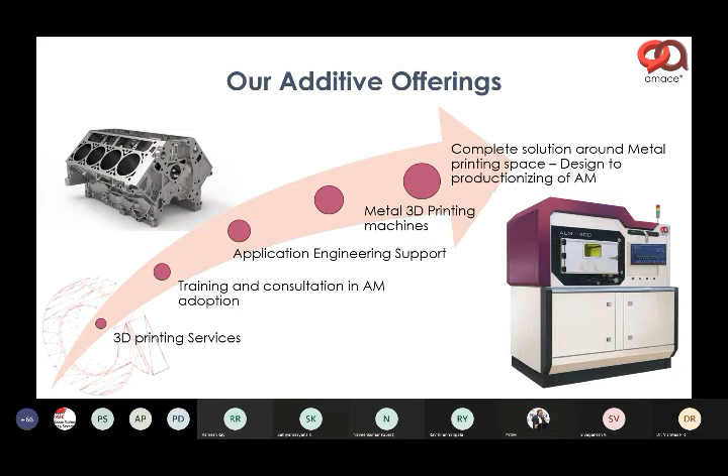We make metal printing machines. As you can see on the right side, that's our machine, a high productivity machine which we're launching very soon. And of course we understand the complete ecosystem, so we offer the complete end-to-end solution around metal printing space, all the way from design to productionizing for additive manufacturing. So this is what we had to say about our company.

Just to sum it up, what is the state of additive in India? This is one of the perspectives, though we brought out multiple aspects to give you a brief of how India has been doing on this.

Additive is being used by automotive manufacturers largely for prototype development and batch production, and by the energy sector for low volume manufacturing, because the volumes in the energy sector are limited, so people find it much more suitable to switch to 3D printing here in India.

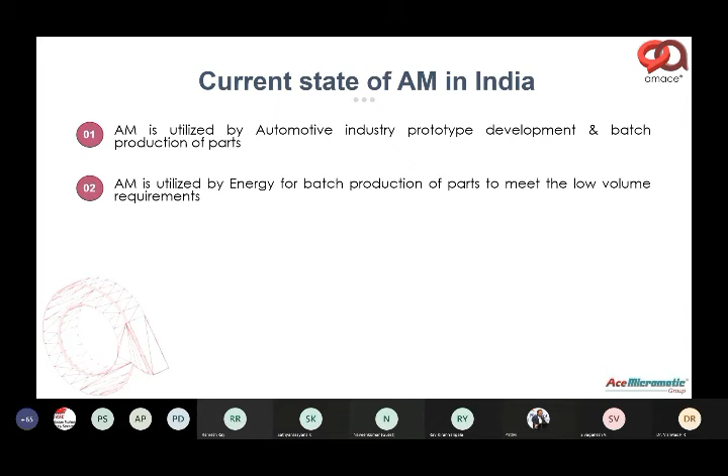I am referring to people like GTREs, the BHELs, who have been printing their turbine blades with very special shapes and internal cooling channels, so you have a very beautiful airflow. The temperatures are better, much better wear resistance. A lot of dynamic analysis are being done, and then they're being converted into 3D printing of these energy parts. So a lot of low volume production is happening beautifully here in India.

Medical industry, very interestingly, there are multiple manufacturers who've been producing implants here in India, 3D printing these medical metal implants. There are more than 25 plus machines being used by dental implants itself here in India. And also people are printing surgical assists, equipment which will support production or operations of surgeries, using 3D printing or additive manufacturing.

Right now, as we speak, there are over 150 metal machines installed all over India, and interestingly our government institutions have been playing a very pivotal role in doing research in this subject. So over one third of these machines are located in government institutions.

People like lecturers, GTREs, BHELs, and then we have DRDOs. Every lab of DRDO either has a machine or is buying a machine, and many others like this have been investing in this technology for many years.

In fact, you'll be surprised if I tell you the first metal printer that came to India was 18 years ago through our CMTI, very much here in Bangalore, where we come from. So way back in 2004 is when the first metal printer came to India, and they still continue to use that product both for research purposes and some small parts and small application development.

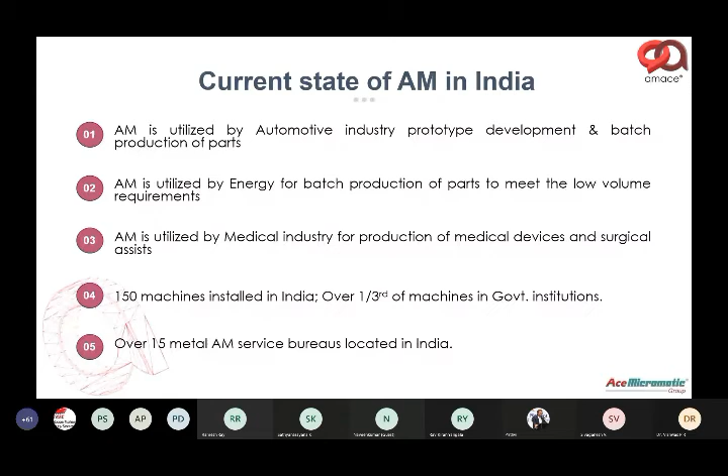And there are over 15 plus metal service bureaus. When I say service bureau, these are companies you can approach to make some of your parts, some of your sample parts. They've been printing parts for a lot of OEMs and component manufacturers for either of these advantages we saw earlier. So that is what has been happening - more than 15 plus metal service providers.

Some of the key OEMs like Hero MotoCorp, Bajaj Auto, MRF, Honeywell, GE, etc. have already invested in metal printing equipment. They've been using it for their R&D and prototype development. Other OEMs like TVS, Royal Enfield, etc. have been extensively using additive manufacturing for their development from service bureaus, and they've been learning and developing many of their new parts, new products using this technology here in India.

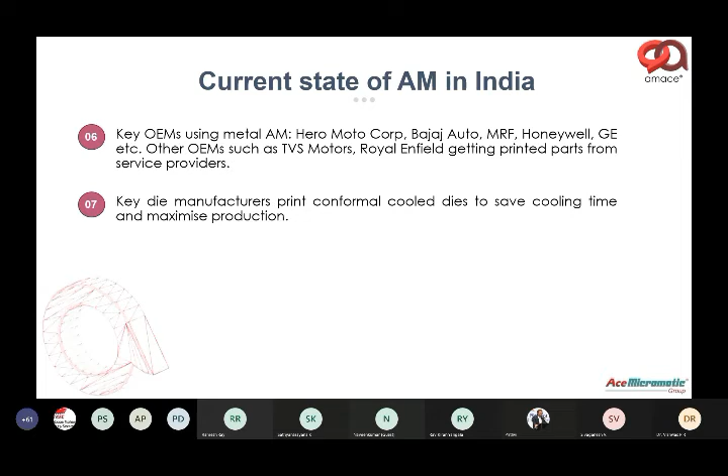Some of the die manufacturers have been exploring, and some of the advanced ones have already ventured into doing their dies using conformal cooling and high-power solutions, where we've been able to save cooling time in plastic injection molding applications.

As I said, many hundreds of plastic and polymer industry-ready machines are being used in India, where the machines are being used either for quick sample production, sample part development, or another application where a fixture is being made or something like that.

Hello, Dr. Vishwas. Yes sir, there is some background noise sir, your voice is not audible sir. Okay, let me see if it will get any better. Give me just a second. Is it any better now? Am I audible now? No sir, it is still feeble, your voice is feeble actually.

Is it any better now? I've come to a little more quieter place. I hope this is better. Still not audible. Hello? No sir, very feeble sir. Okay, give me one second, let me just check, I can do something about it. Apologies for the same.

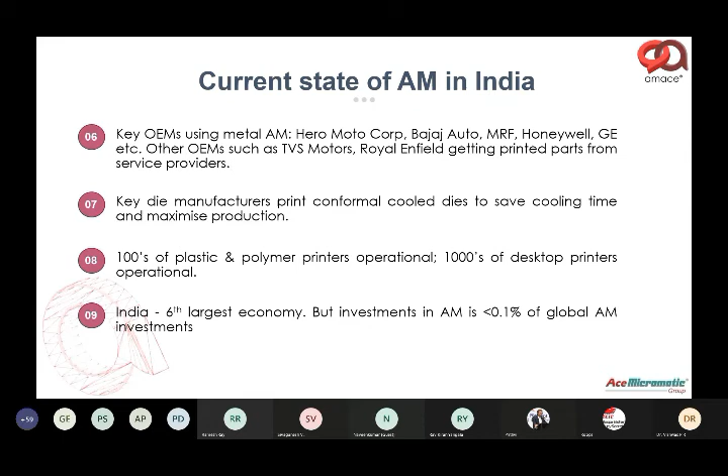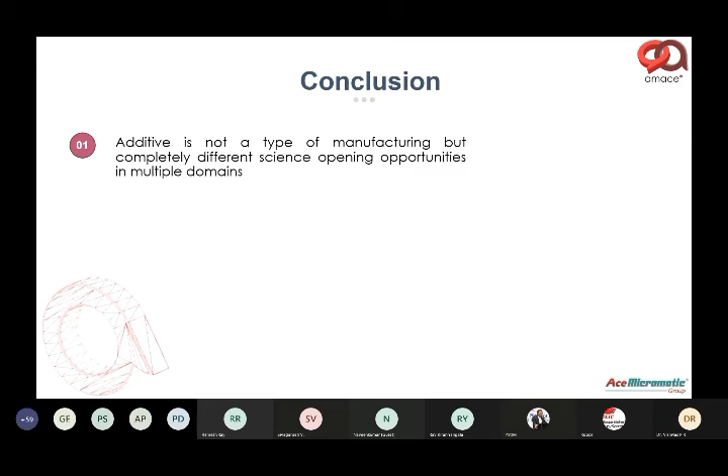Something to think about. Just to conclude, taking on from the previous point, additive is not just a type of manufacturing, but a whole new science which has opened up opportunities in multiple domains, as I explained in each of the slides, all the way from prototyping to complete full-fledged production.

Today, additive manufacturing is changing the whole scenario in manufacturing. It's largely being used not just for prototyping, but also in production. We ourselves are producing continuous high-volume production of certain parts for key customers today here in India.

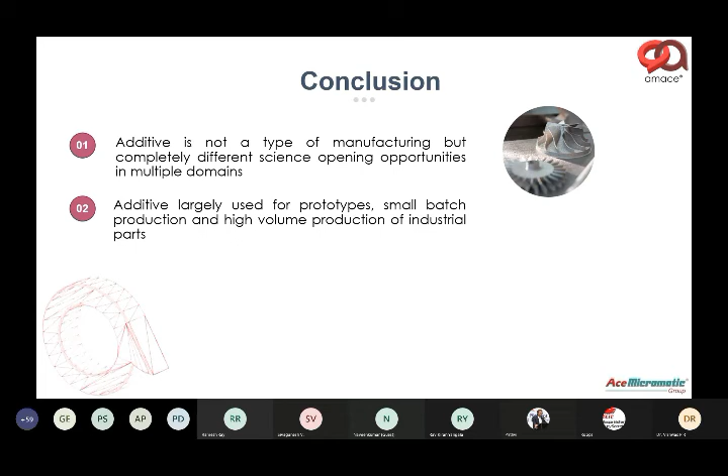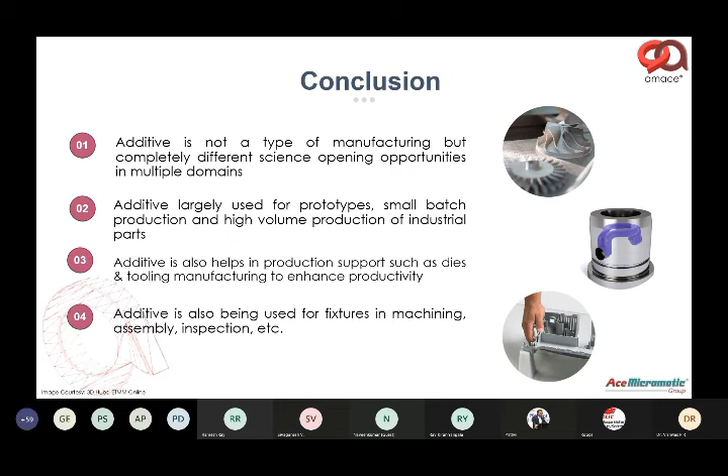Additive is also helping production of support equipment like tools, dies, patterns, etc. for enhancing productivity. And finally, additive is also being used for fixtures in machining, assemblies, and inspection. We work with customers for whom we made fixtures for inspection and for assembly in the whole process of manufacturing. So this is what additive has to give.

To conclude, we strongly encourage all of you to add a little bit of additive into your own manufacturing, in whichever way possible, because this is sure to stay. This is a technology which is changing the face of manufacturing all around the world, but in a very slow and steady way. So that's what I had to say today.